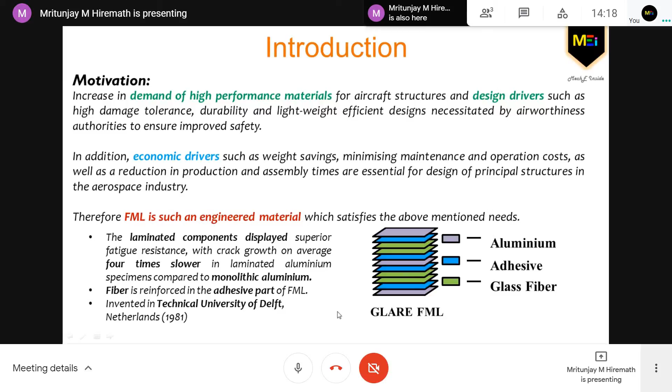So coming to historical development, in the early 1960s, aerospace structures were solely developed from monolithic aluminum because of its light weight and moderate strength. But there was a problem in the fatigue resistance. It could not bear the fatigue whenever it was exposed to such harsh environments.

Therefore, an idea of 2 sheets of aluminum was developed, wherein from the concept of plane stress, whenever there is a crack present in the aluminum sheet, the plastic zone present at the crack tip reduces the crack propagation rate. And if these aluminum sheets are joined by adhesive, it acts as a crack divider, making the crack propagation rate lower by 3 to 4 times.

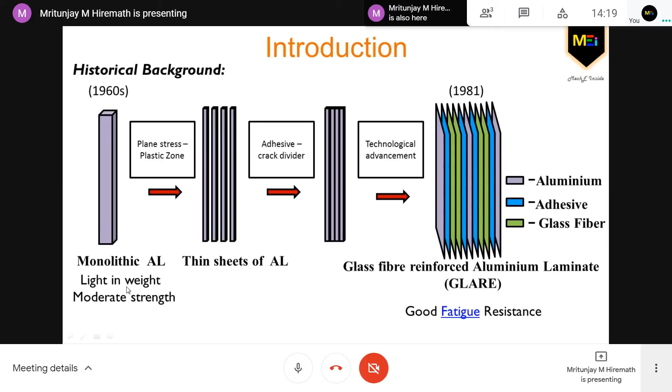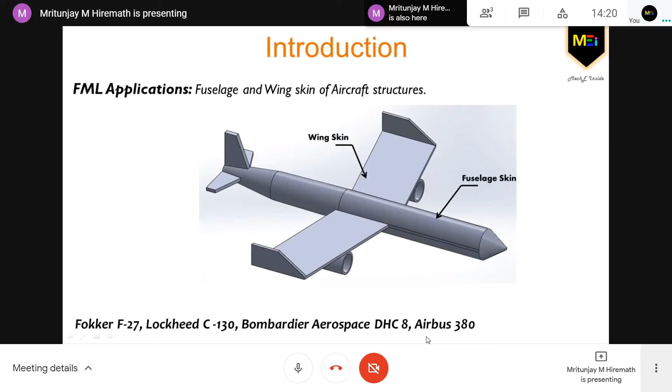But as technology advanced, glass fibers were also introduced in between the aluminum sheets, and hence the development of glass fiber reinforced aluminum took place. This exhibited good fatigue resistance compared to the monolithic aluminum developed earlier. Its applications include the fuselage and wing skin of aircraft structures, and now it's being commercially used in Fokker, Lockheed, Bombardier aircraft, and even in the Airbus 380 aircraft.

So coming to its properties, they depend on the metal volume fraction in the rule of mixture. On the right hand side, you can see how the load is carried by the glass fiber whenever a crack is present in the laminate. The glass fiber acts as a crack bridging mechanism and carries the maximum load whenever a crack is present in the aluminum. The metal volume fraction heavily depends on the aluminum thickness and its contribution to the whole laminate.

And for the calculation of the properties, this is the same as the formula used for conventional composites, wherein, for instance, if I want to calculate the ultimate tensile strength of the whole laminate, it depends on the metal volume fraction and the constituents' ultimate tensile strength. Here it will be the aluminum ultimate tensile strength and the composite ultimate tensile strength. Similarly, the strength and the modulus of the laminate are calculated.

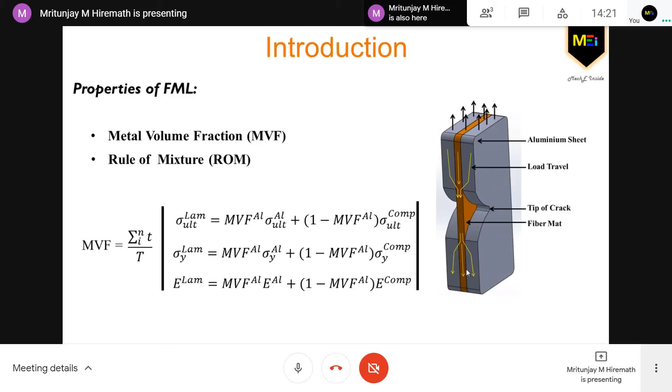So our objective was to focus on the role of surface treatment. As I showed earlier, the bonding between the aluminum and the glass fiber was not that strong. Therefore, we need some sort of surface treatment of the aluminum so that strong bonding exists between them and it doesn't fail at lower loads. So the first focus is on treating the aluminum surface in order to enhance the adhesion between the plies.

The second focus is to embed some nanofillers in the epoxy matrix so that we have good interlaminar bonding strength in the laminate. The third is to identify the best configuration of FML suitable to characterize mechanically over the control FML. These objectives were fulfilled while doing the research in our institute, our Matless Lab, and were successfully achieved.

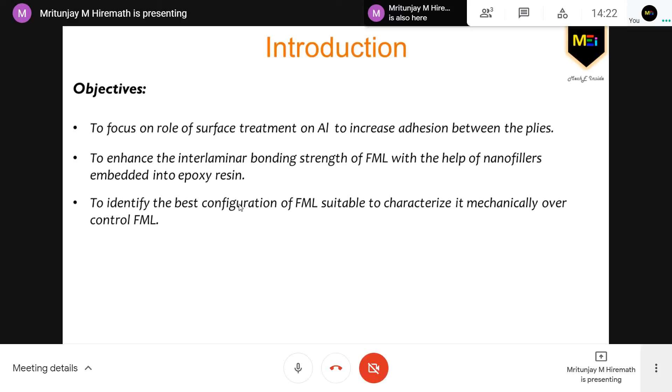So in order to carry out these objectives, the experimental details include surface treatment of the aluminium first. The first surface treatment was mechanically abrading the aluminium surface with 80 grit sandpaper. The second was etching it chemically with the aerospace standard P2 etching. This is how the P2 etching process was carried out. And the next step was to fabricate the fiber metal laminate.

This process indicates how the nanofiller is processed in order to mix it with the epoxy, and the whole constituent is used as a matrix. Once the matrix was ready, the composite was fabricated by preparing the aluminium and stacking the aluminium and the matrix.

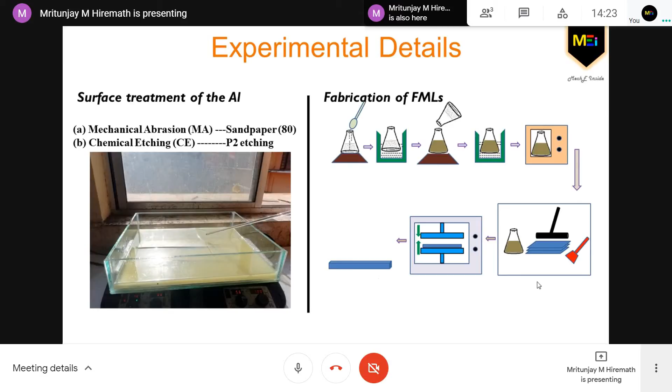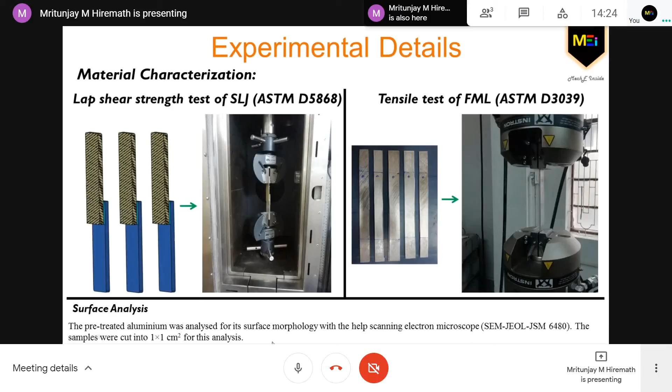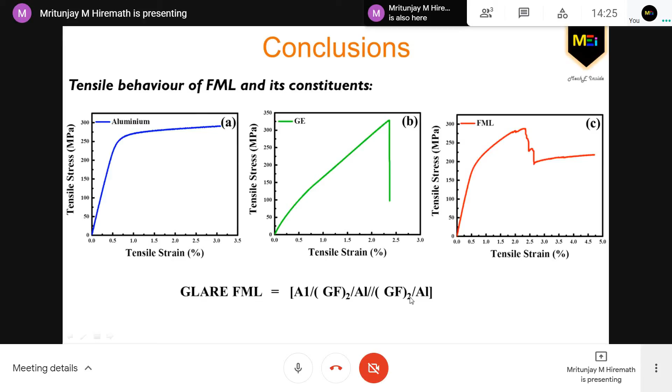And this fiber metal laminate is specifically done for this particular configuration, GLARE FML, wherein the configuration includes first the aluminium, then 2 mats of glass fiber, then the aluminium, then 2 mats of glass fiber, and then the aluminium. Coming to the theoretical approach, as I mentioned earlier, it included using the rule of mixture in order to evaluate the ultimate tensile strength, yield strength, and the modulus.

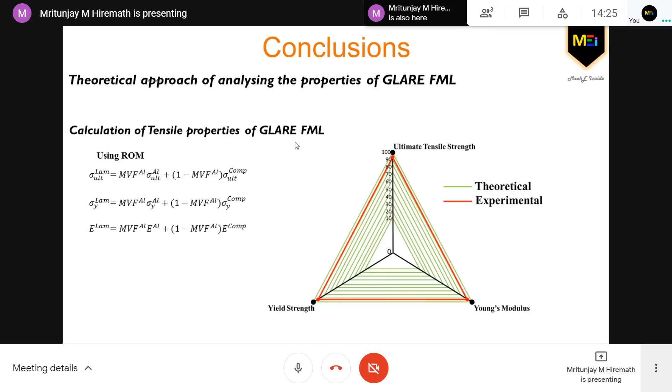And we can see a triangular shape here. What this means is that the green color indicates the theoretical values. If those were 100%, then the experimental values achieved were almost the same as the theoretical values. So the error was less than 5% for ultimate tensile strength, yield strength, and Young's modulus.

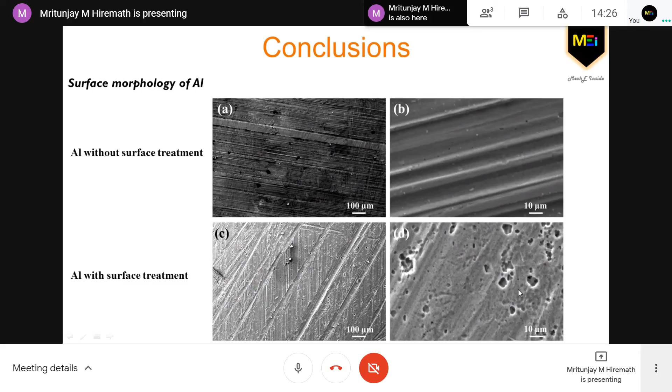So coming back to the mechanical response of the single lap joint, specifically for the aluminium and the glass epoxy, and how the bond quality is exhibited by the neat epoxy and the adhesive wherein the nanofillers are used. The nanofiller embedded epoxy exhibits a higher load carrying capacity compared to the neat epoxy.

On the right hand side, the shear strength is computed and plotted with respect to the loading rate. The test was conducted at two loading rates, 5 mm per minute and 50 mm per minute, for both adhesives. That is, this is for neat epoxy, and this is for the nanofiller embedded epoxy.

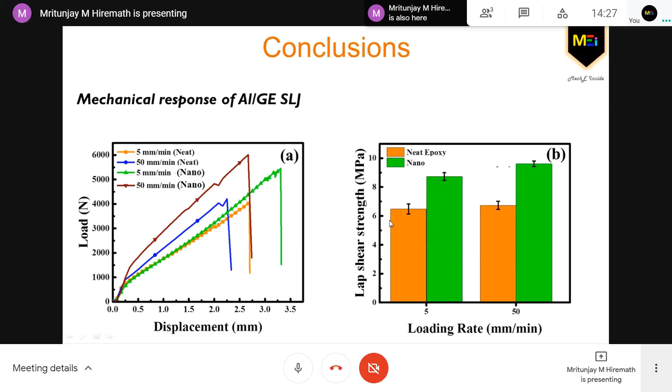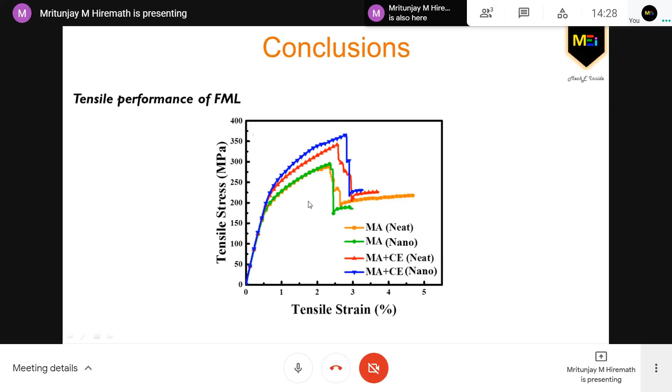So as we came to know that nanofiller embedded epoxy exhibits good bond quality compared to the neat epoxy, this was used as the adhesive in order to get the tensile performance of a fiber metal laminate. And here also we can see that when mechanical abrasion plus chemical etching is carried out and the nanofiller epoxy is used as adhesive, it exhibits a very high stress-strain response and hence a very good load carrying capacity compared to the conventional neat fiber metal laminate.